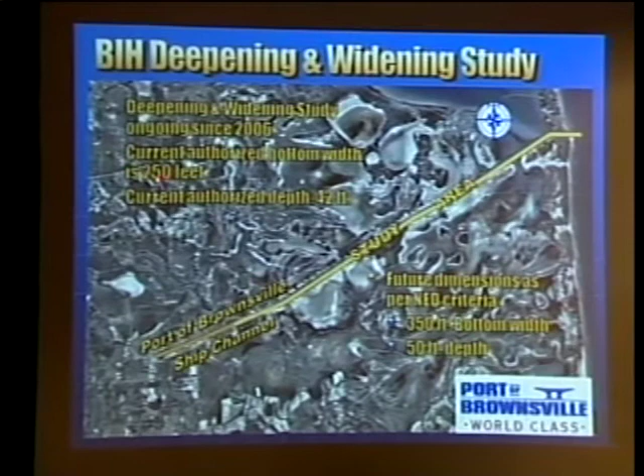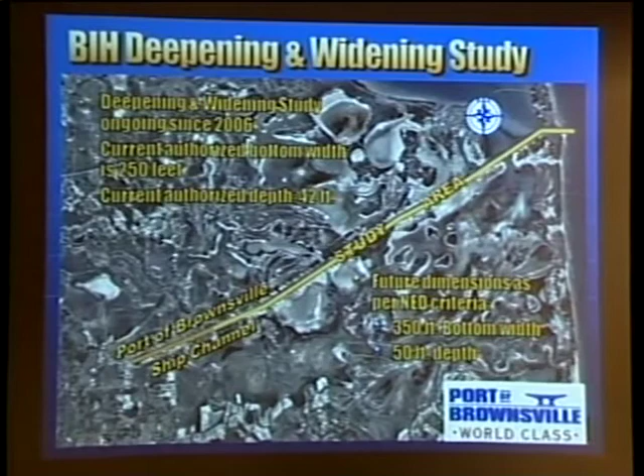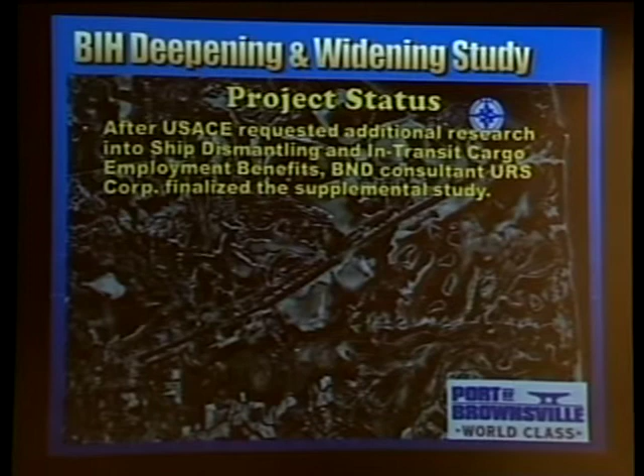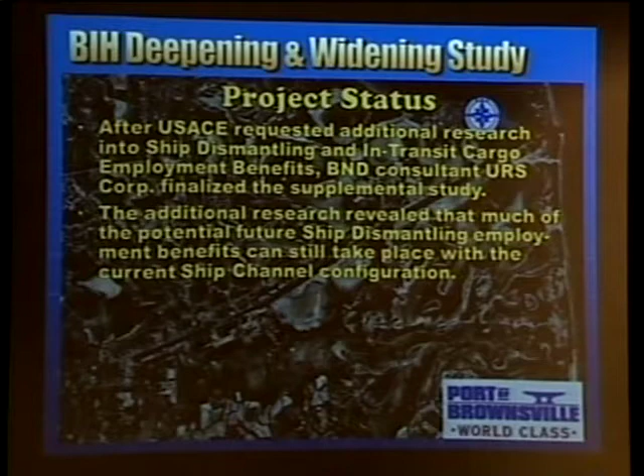The first one, as we've always informed you about, is the BIH widening study. In this project, we've got the overall picture of the channel showing the original bottom width and depth, and the projected bottom width and depth we're working on for the NED criteria, the National Economic Development Criteria. Where we are with this project: the Corps had requested additional research on ship dismantling and in-transit cargo, and BND consultant URS finalized the supplemental study for that. The additional research revealed that a lot of the potential future ship dismantling employment benefits can still take place with the current ship channel configuration, meaning what they had originally estimated as a benefit from deepening and widening basically went away.

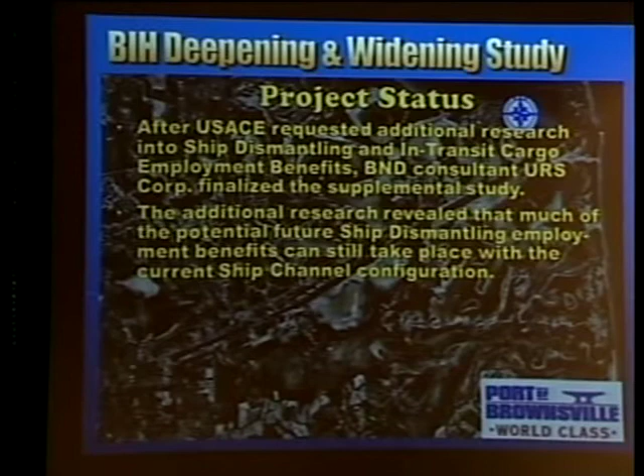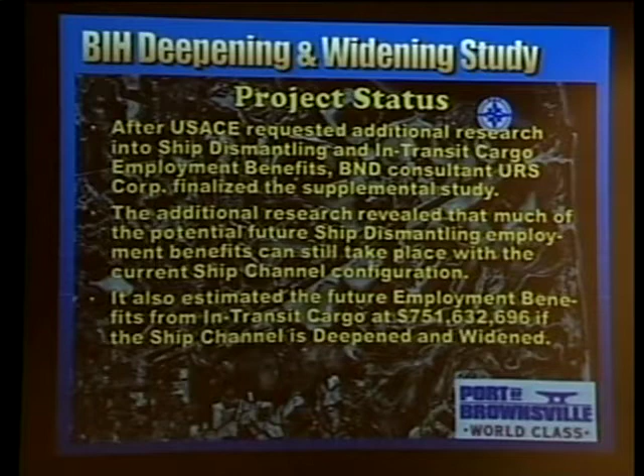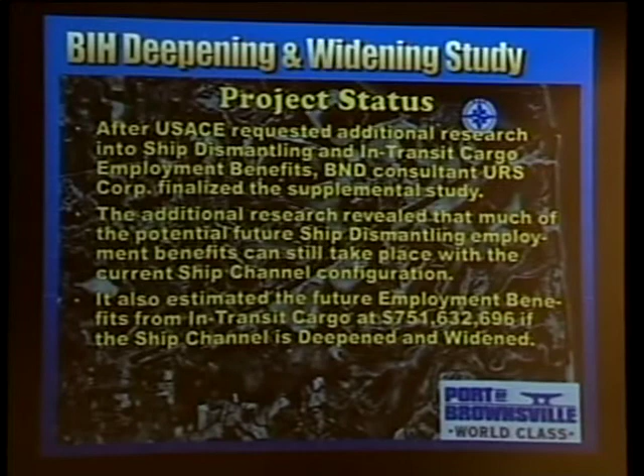There's no benefit by deepening and widening to the ship dismantling operation from employment benefits. However, the supplemental study, when they went into these numbers in more depth, determined there were more significant employment benefits if the channel is deepened and widened for in-transit cargo. The amount they estimated was $751,632,696 if the ship channel is deepened and widened. That's the number they've come up with on the report right now. That report has been submitted to the Corps and to us. The Corps is reviewing it now, and there are some things they're tweaking to finalize it, but they've submitted that final draft, and that's the number they're projecting. That's a very significant number on a 250 or so million dollar project. At 751 million in benefits, that alone gives us a 3-to-1 benefit-cost ratio. So that's very good.

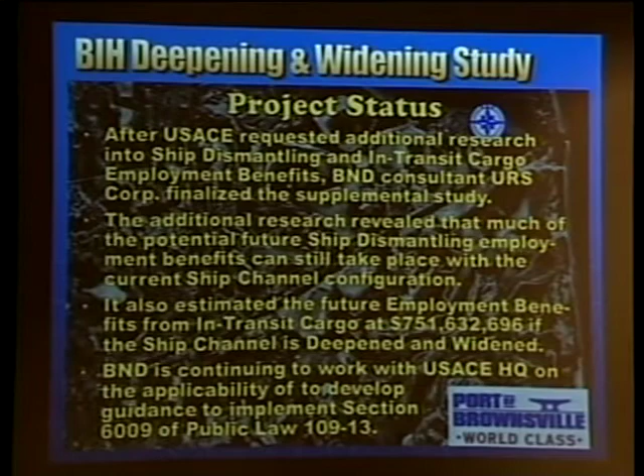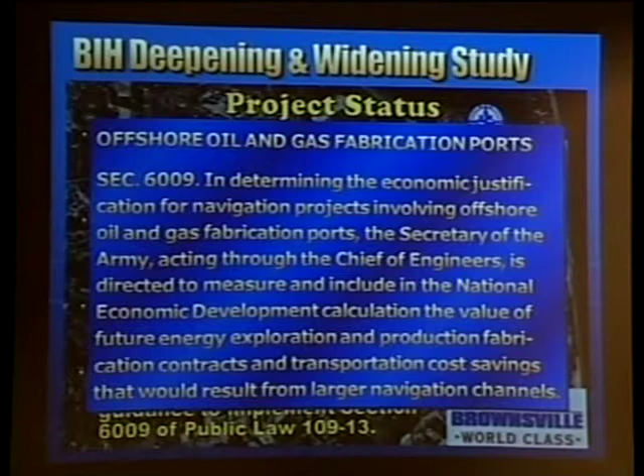We're continuing to work with the Corps and headquarters on the applicability and developing guidance to implement Section 6009 of Public Law 109-13. I don't know how many of you are familiar with that law, but I wanted to show you exactly what it is. It says: in determining the economic justification for navigation projects involving offshore oil and gas fabrication ports, the Secretary of the Army, acting through the Chief of Engineers, is directed to measure and include in the National Economic Development calculation the value of future energy exploration and production fabrication contracts and transportation cost savings that will result from larger navigation channels. This means to us that they're supposed to include it. So that's what we're pressing, and we're continuing to work with them on that.

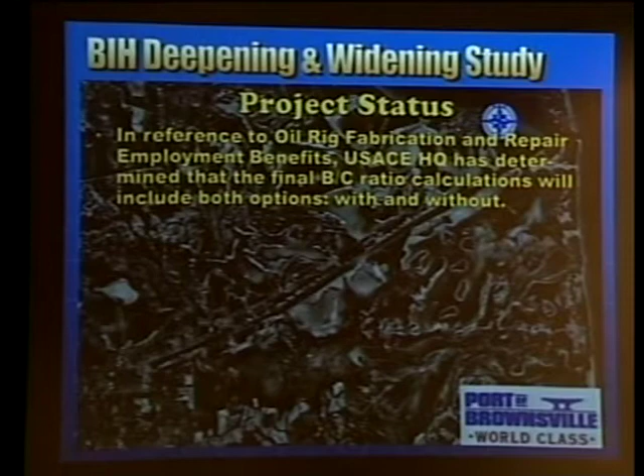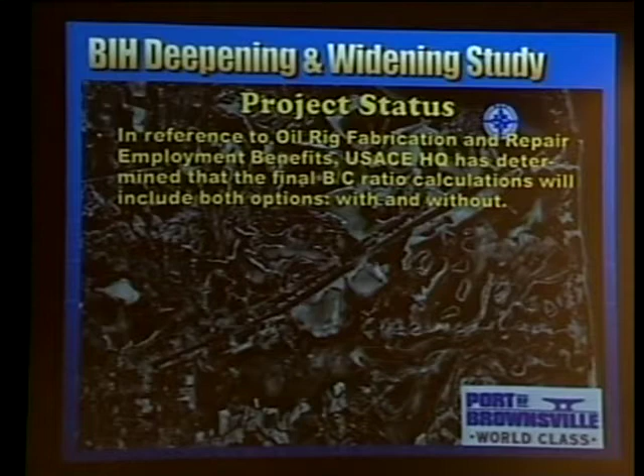In reference to oil rig fabrication and repair, where we are right now with the Corps is that they have decided to do the calculation, see what the benefits will be, and produce a report with and without those benefits included. The benefit-cost ratio calculations will show both options. That's positive on our side because we'll be able to see those numbers. It's not definite yet that they're going to include them, but we are going to see those numbers, so I think that puts us ahead. Also, on the value engineering study, the recommendations, as you recall, were to narrow the channel in one section and make it a little less deep in another.

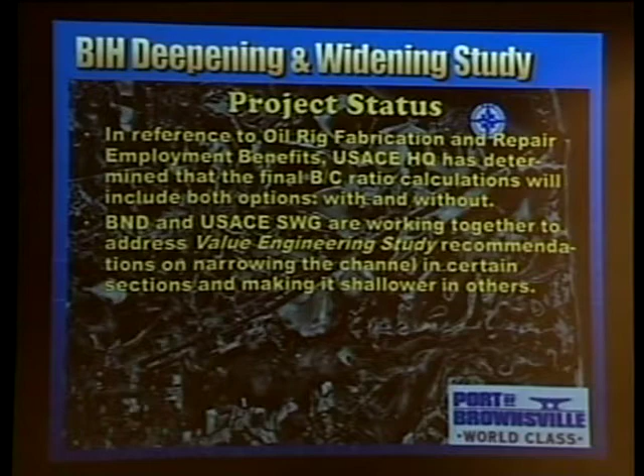After studying it, we believe that shallowing up the turning basin a little bit is not a problem. It's only a $7 million savings. But the narrowing that they want to do, we feel is a problem, and we submitted documentation backing up the fact that we needed to remain at 350. Substantially that came from AmFELS, because it's really the rigs that are going to need the wider 350 width.

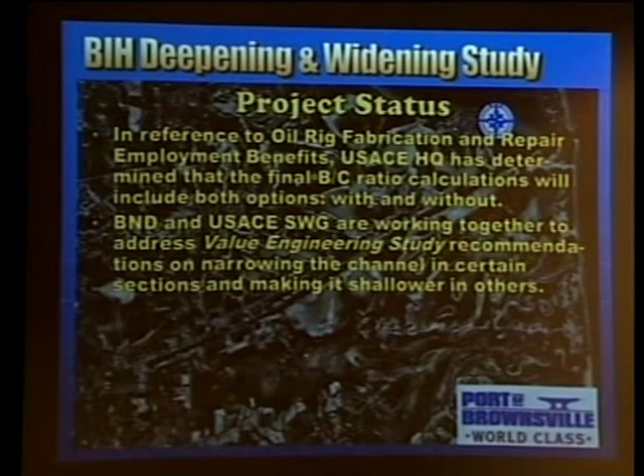Yes, Mr. Chavez, I'd like to, just so the people watching on television and the people from Leadership Brownsville understand what we're saying. When we widen the channel, it doesn't mean the banks are going to change. It's the bottom of the channel, where the depth is, that will widen from 250 feet to 350 feet. Well, that is correct, but there will be some impact, yeah, but not all of it, not throughout the whole channel. I'm just trying to get them a clear picture of what it is we're trying to do.

And what you're talking about here is that we're trying to get the Corps to look at it two ways: that in the national interest, we have both the job benefit as well as a commerce benefit to the trade of the United States.

But local jobs will be provided, and that's exactly the $750 million worth of jobs over that period. So that's just in transit. You haven't coupled in the numbers for the fabrication, the rig fabrication. And then the other numbers are just the regular commerce that would accrue from the widening and deepening, which is the additional tonnage that we would experience.

Well, I know when we went to 42 feet, it opened up a whole new world for us, and at 50 feet and wider it will open up more.

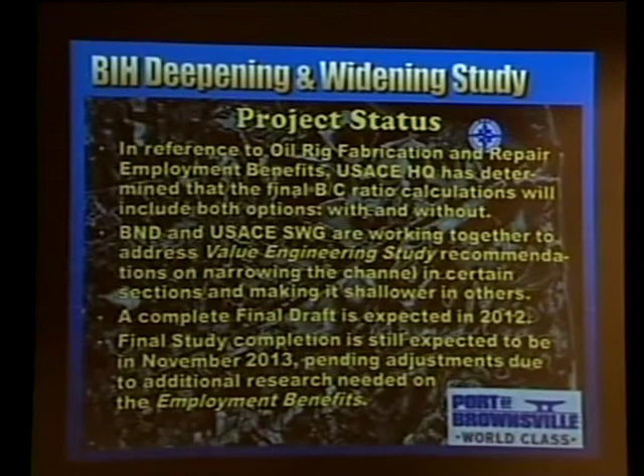Thank you, that's a very good point. And like I said, the complete final draft is expected in 2012, and the final study completion is still expected to be towards the end of 2013. It's of course pending adjustments on finalizing this issue of the employment benefits.

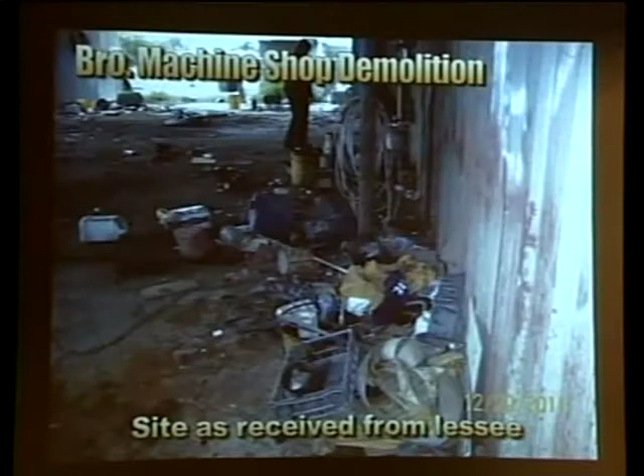Now I'm going to show you some projects that are being done internally by the Corps. Some of them are minor, some are a little more significant. This one here is the Brownsville Machine Shop demolition. This is a building—Mr. Garza is here if there's any questions—this is a building that was in very, very severe disrepair.

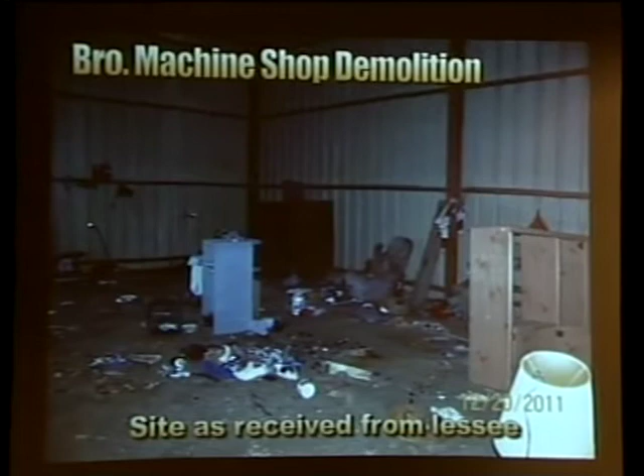This is the site as it was received, and these are some pictures of that area the way that it was. This is a lot of the debris that was at the site, right over here behind Milo Road.

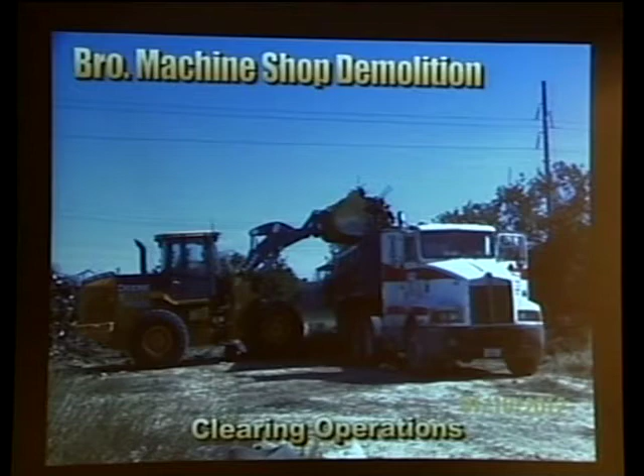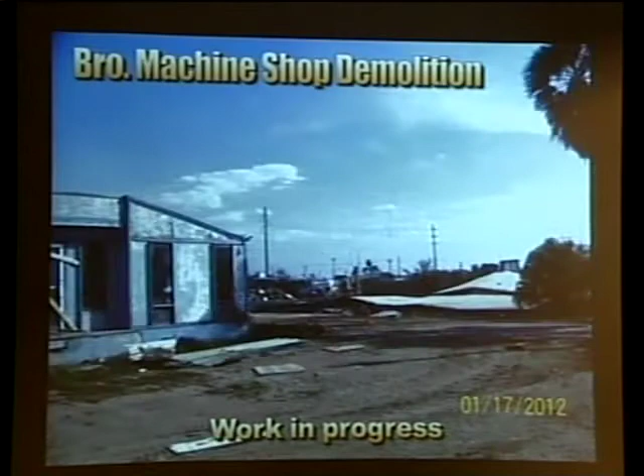And here's when we start the clearing operations with port equipment, trying to get everything out of the way. This is debris from demolition of the building. Again, debris from demolition, a work in progress, and basically most of it is cleared already. The only thing remaining at this point is that building, and the reason it hasn't been demolished is because there's some, what we consider, personal effects, Mr.

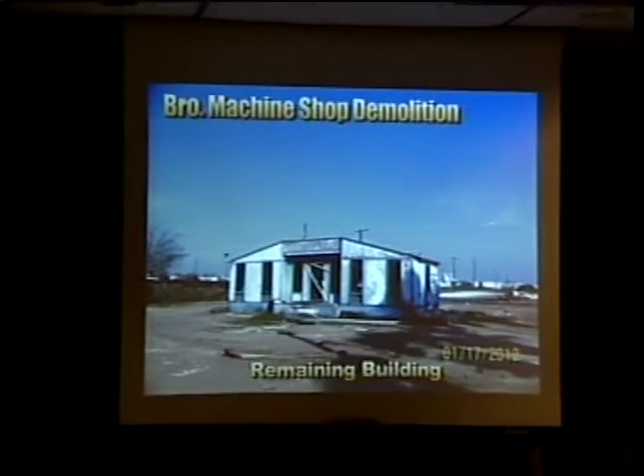Or maybe things of sentimental value that are in there, some pictures, family photographs and things. Mr. Garza can address that in more detail. Basically, when we went in there to look at what was inside before we demolished it, we found some pictures that belonged to the tenant that was there. So we decided to notify the tenant to give him an opportunity to come and pick them up. Unfortunately, he hasn't done that. So what we're going to do is box them up, and they're not that many, take them to the shop and store them there. Maybe one of these days he'll want to pick them up, but we don't want to destroy them. And that's why this one's still standing.

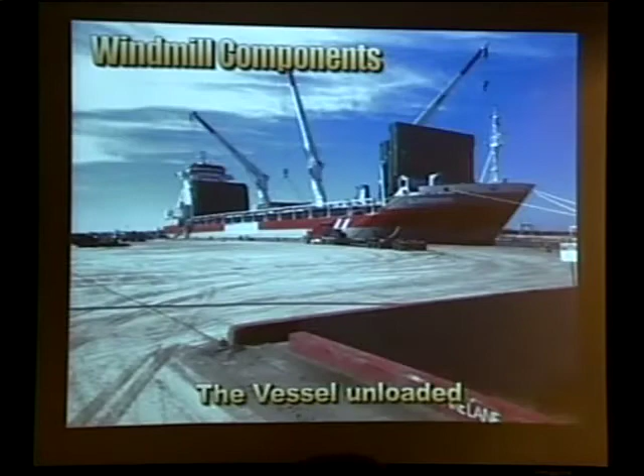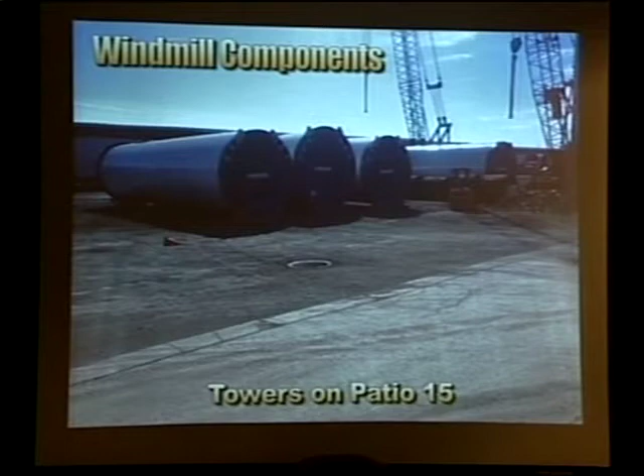Another project, again in-house, is the one that we talked about earlier. This is the Windmill Components. This is the vessel that came in, the Wagenborg, and this is towers being unloaded. The vessel is already unloaded here, and we've got the towers on the patio. These are the segments. There are three types of segments, the three components that make up the tower, and they're all spread out throughout the area of patio 15, as Mike informed the customers earlier. So these are just shots of that.

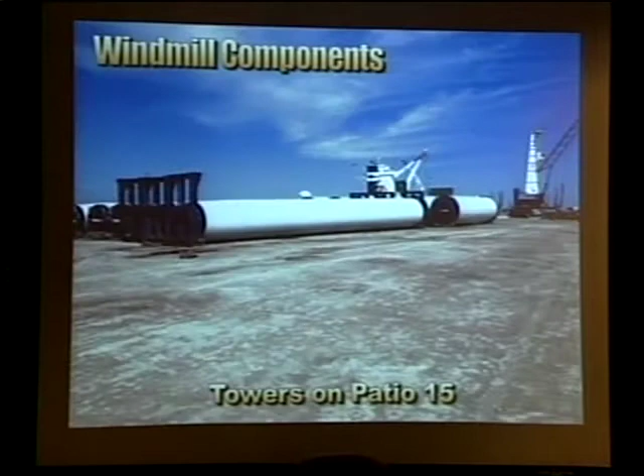Here's a video of one of those towers being brought out. It's a massive component, so it has to be brought out very, very slowly. Looks like a rocket ship, basically. This was one of the long sections, about 100 feet long, Michael. It obviously has to come out very carefully. There are some other videos we didn't add that show how they came in and backed it up into the places where they were going to go. So this is just showing how it came out, how the turn came out and everything.

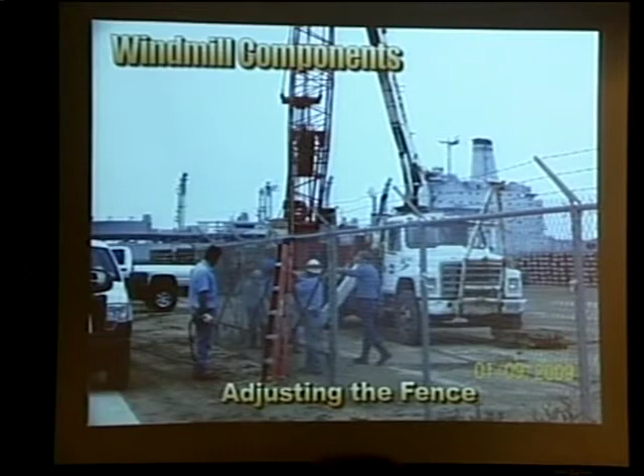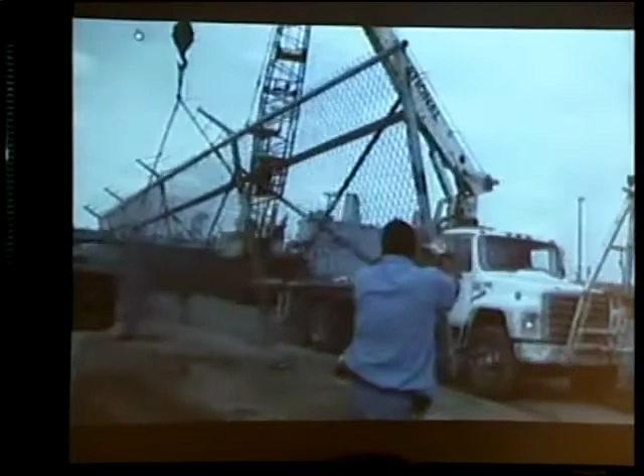So that's about it right there. One of the things our maintenance department also did is create a manner in which to remove the fence and reinstall it in the short term. Here's a shot of them adjusting the fence and cutting some of the chain links to remove only the portion that needed to be removed, and then have it replaced. Here's a video showing a little bit of what they were doing, bringing it up and down with the winch. Again, this was done by our own in-house crew. This section of the fence was removed, and after the movement took place, the fence was replaced again. This one just shows our people working.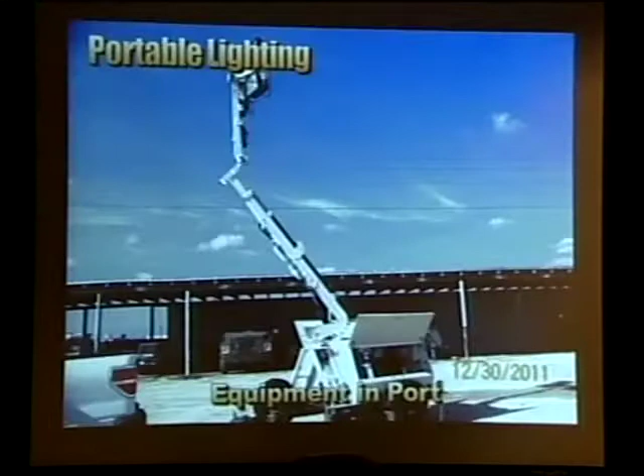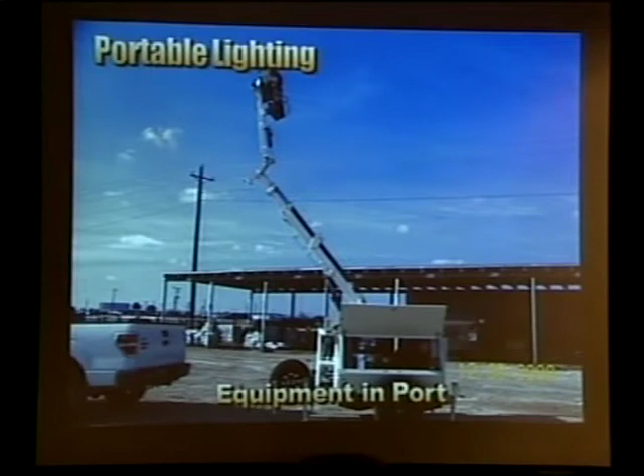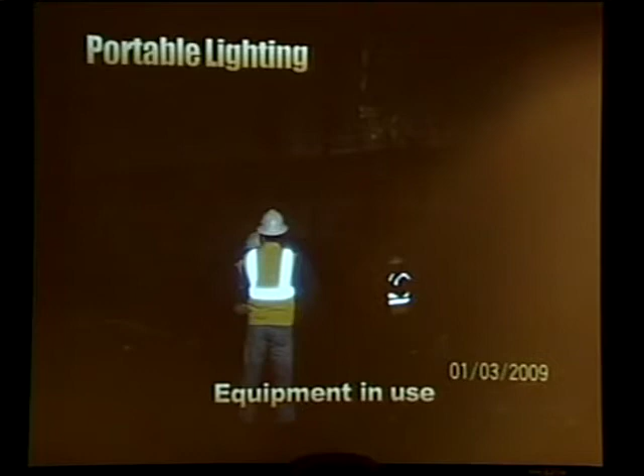Another project we're looking at is the acquisition we made of portable lighting. These are the lights that were acquired recently. Four of these units were delivered to the port, and they were actually used pretty soon after, because on one of our docks where we were working on the electrical systems, one of the stevedores needed some lighting during the night, so they were basically used. These are the units over there, and here's another one, just helping the stevedores do the work they were doing. No, sir, we were just kind of lucky that we got them when we did, because a couple of days after we needed to deploy them to dock 11, and the stevedore was very happy that we could provide the lighting. So they worked well there.

Great job. Who said wow? We need to remodel what's in the building.

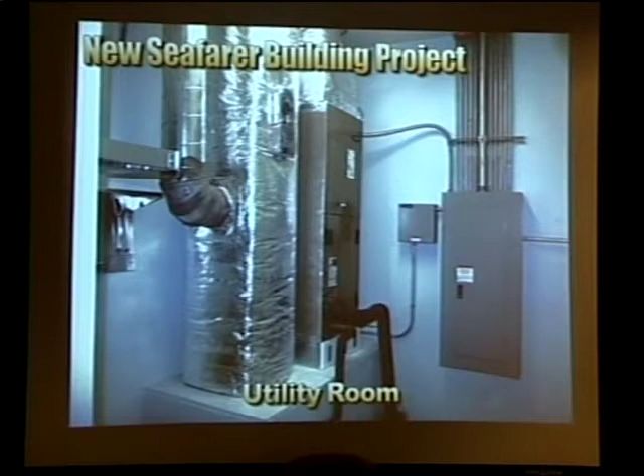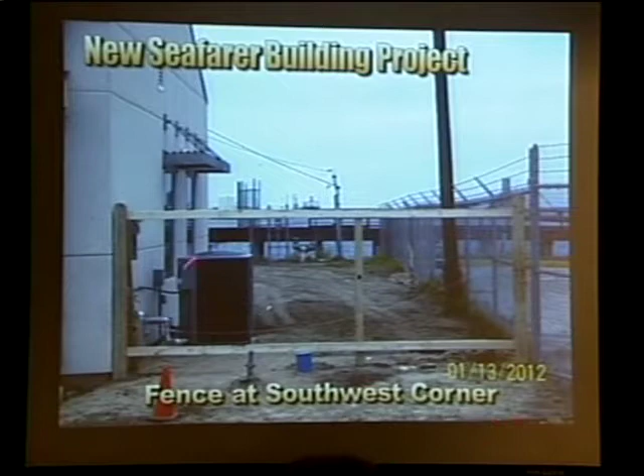We're going to extend that fence from the other side. This is a completed fence, again work that was done by our own maintenance department.

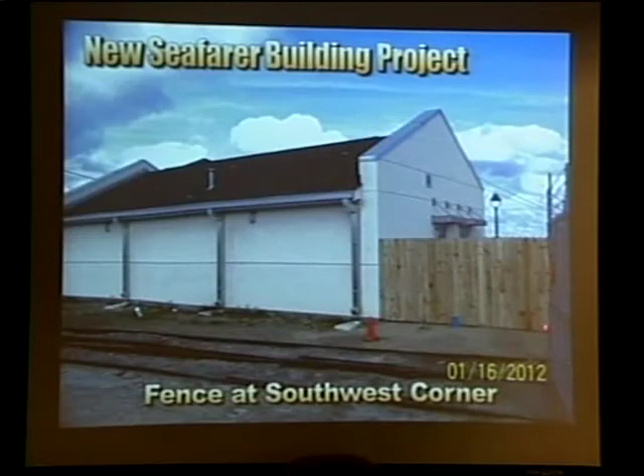This is the fence along the back wall. The fence is going to continue there on the other side, and this is basically the end of that back wall - it's going to continue along here.

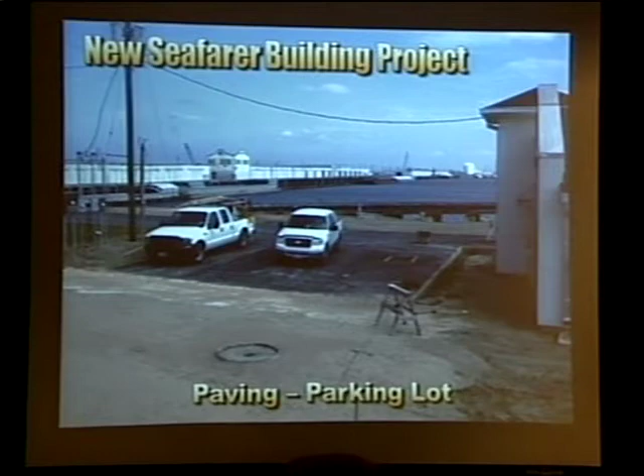Here you see a bit of the work on the concrete pavers that will go in this area for the sidewalk leading into the Seamen's Center. This is the parking area, already hot mixed and everything. This is the access to the Seamen's Center, Harbor Master Road coming in.

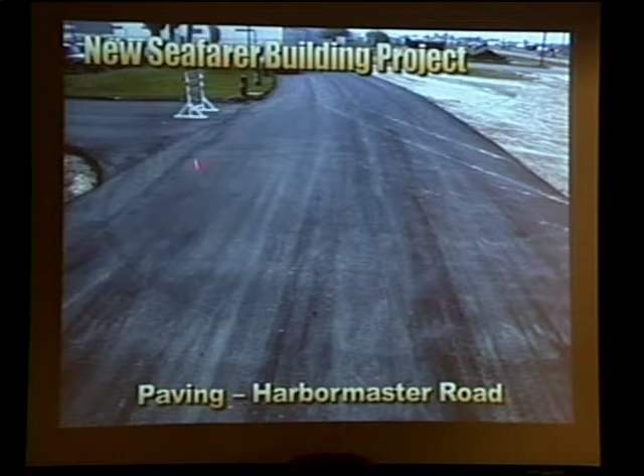This is the entrance to Dock 4 coming back, and at the end over there is Windhouse Road. This is Harborside Road, which goes into the Seamen's Center, right there. And this is, of course, the Harbor Master's office.

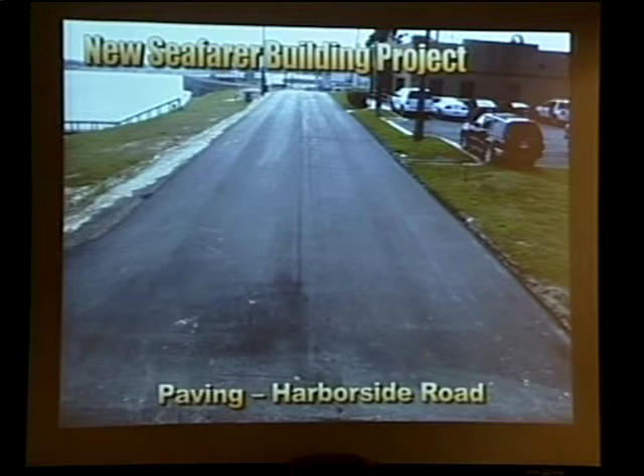So now we have proper paving access to the Seamen's Center. That's it for that. Another project is, of course, the Dock 11 Road Transformer Pad.

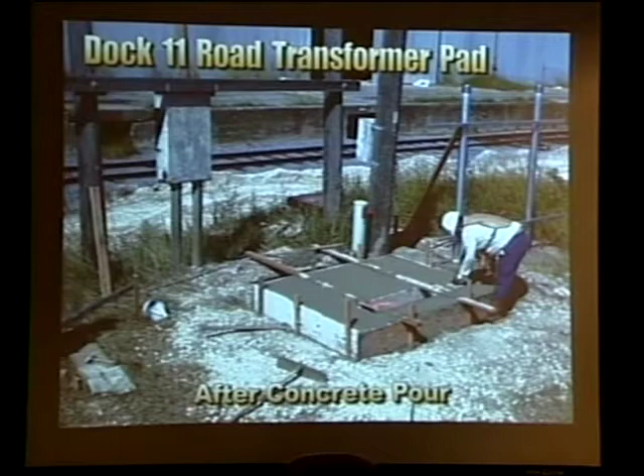This is something we actually had on the books since Siemens came in. This is a picture I had shown you before, left here so you'd remember what the concrete pour was back then. But this is the finished product - the concrete slab with PUV having installed the transformer.

This is the H-frame with stainless steel Unistruts, the meter can, and the cutoff box. This is a close-up of the transformer, the cutoff box and the meter can. And this is another shot from the opposite side showing the box, the cutoff switch, and the meter in place - a shot of the meter.

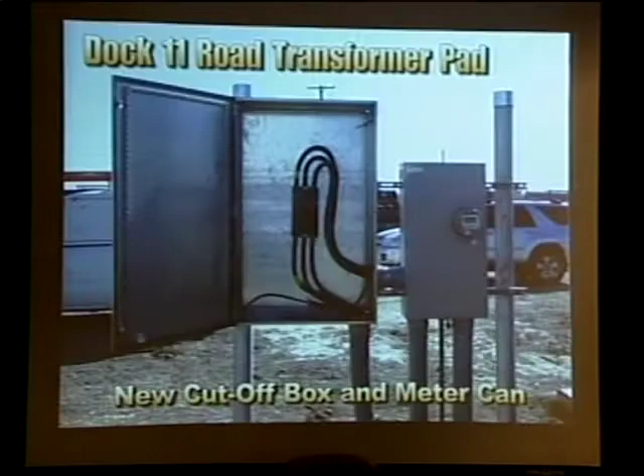So everything is now functioning. Are those poles going to be taken down behind? Yes, the wood poles, the wooden H-frame and everything, that's going out. The overhead wires that came into there, PUV is removing them also - I believe they've already removed them. No, I don't think they have yet, so those are still there but they need to be removed because obviously we're doing this underground. So that's for this project.

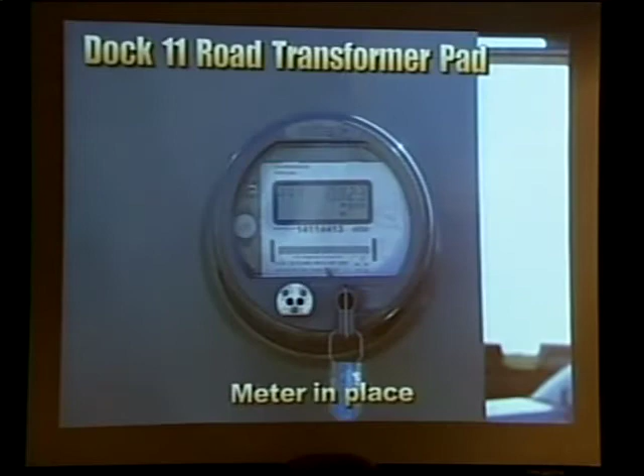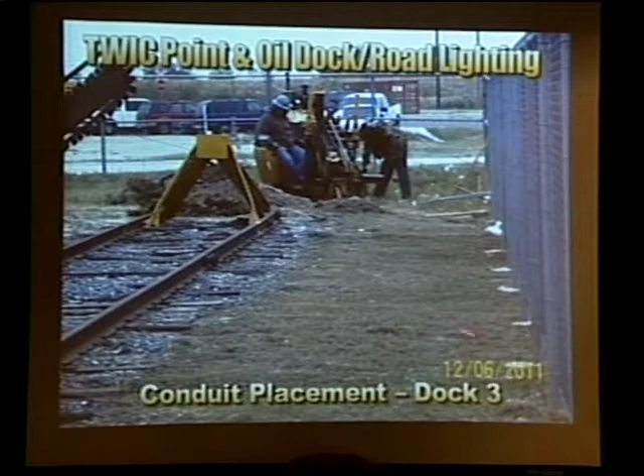Another project we're working on is the TWIC Point and road lighting project, which is placement of conduit on dock number 3. One thing this contractor is doing that we're very happy about is instead of open trenching the whole set of conduits, they have a machine that installs by underground boring.

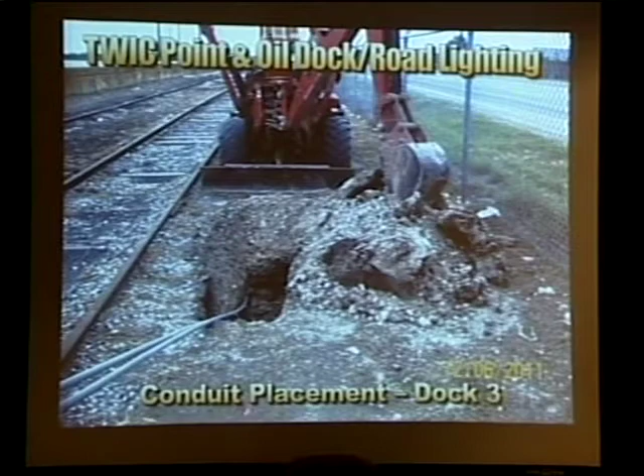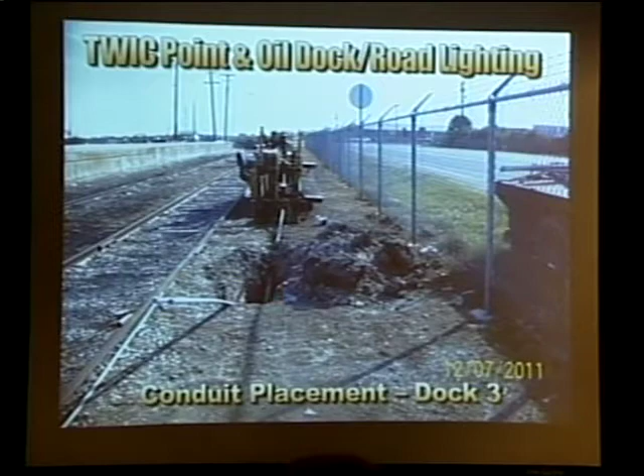So instead of open trenching this whole area behind dock 3, they put everything underground with the conduits. They have to have little areas where they pull up the conduit - this is where it's coming up. Again, this is the conduit placement in dock number 3, you can see that there. This is the dock part, and this is Windhouse Road here, and this is our fence. They only have localized open trenching because most of it is being done by boring, so that's a plus.

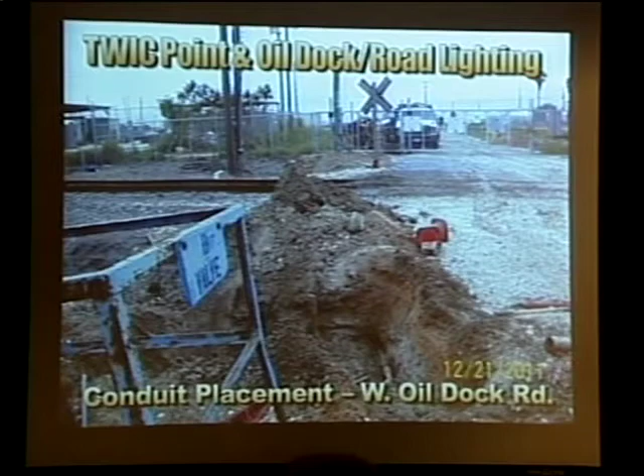See, this is on the entrance to Oil Dock Road 1. Basically, this is Oil Dock 1 on West Oil Dock Road coming in. This is, again, the conduit placement in this area. You see the boring machine there.

That's a lot better. Now, this is an area where there was a lot of old pipes. Most of these actually were not in use, but when they were trying to bore through, they hit them, so they had to open trench to make sure that those were not something they were going to hurt. So they took extreme care going through here.

And the reason I'm telling you this is because we've got an item down the line where this is going to be important. Remember this. So this is one of the things they had to be very careful with because they didn't want to create a situation with any of the existing pipes. Fortunately, after we found these, we found that most of these were not in operation, like I said.

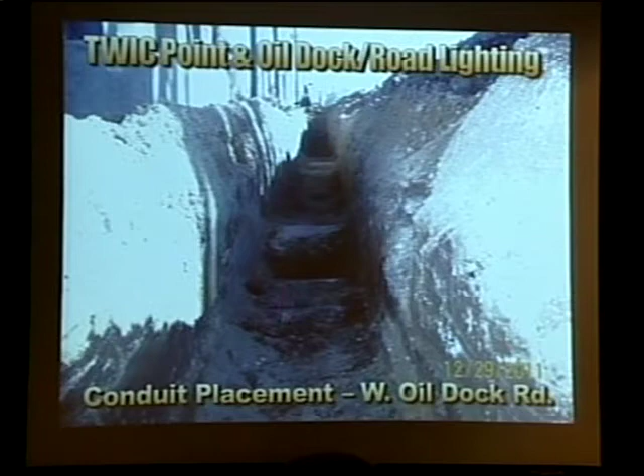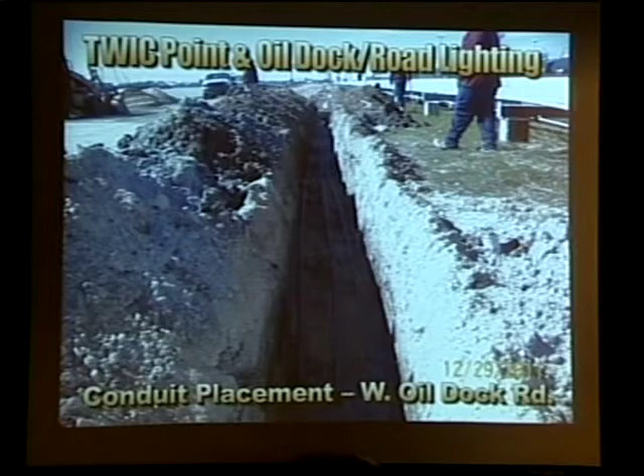So here again is the conduits. Two of these are the conduits that lead to the poles. One of them is a spare, one of them is the feeder, and the other one is a conduit for remote control for the future. And again, these are just shots of West Oil Dock Road.

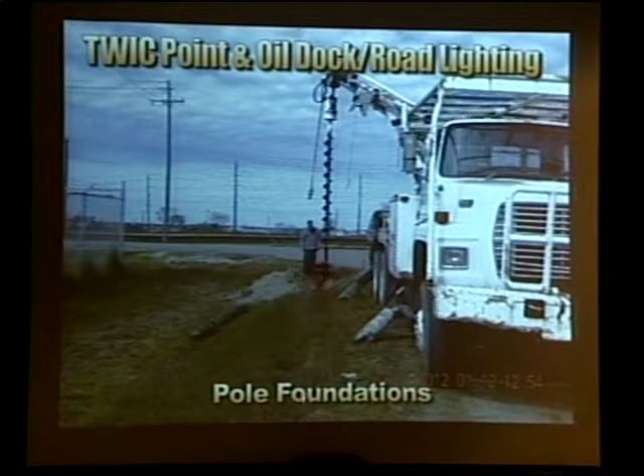Conduit placement, these are now shots of the pole foundations. That's the auger that created the hole that goes down where the concrete is going to be poured. Here, that's what they're doing with their auger. This is the foundation, basically the hole going in, that's going to be filled with concrete. That's actually the ruler used by our inspector to make sure it has the proper dimension.

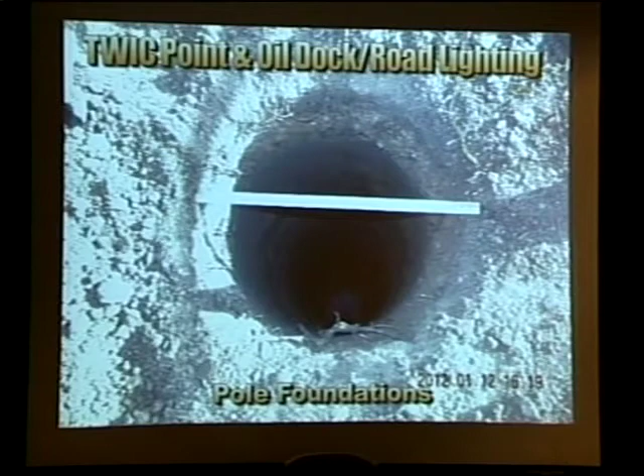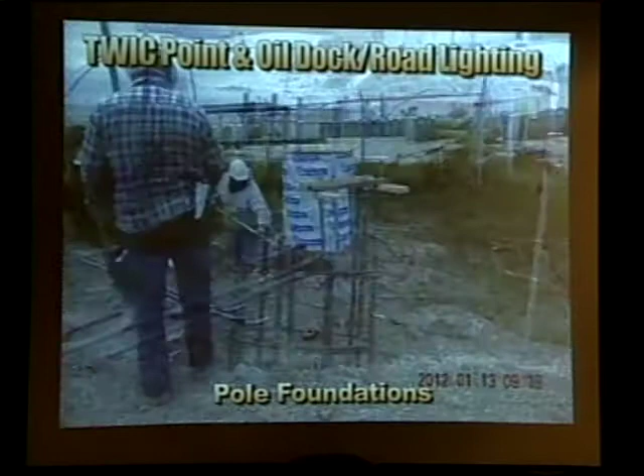This is the reinforcing steel cage that is going in there. This is the cage in place. And this is the form for the concrete, a cardboard cylinder that goes up from the ground, and then this is already poured. You can barely see it there, but the concrete is already in place. Of course, you see the whole thing there with the concrete.

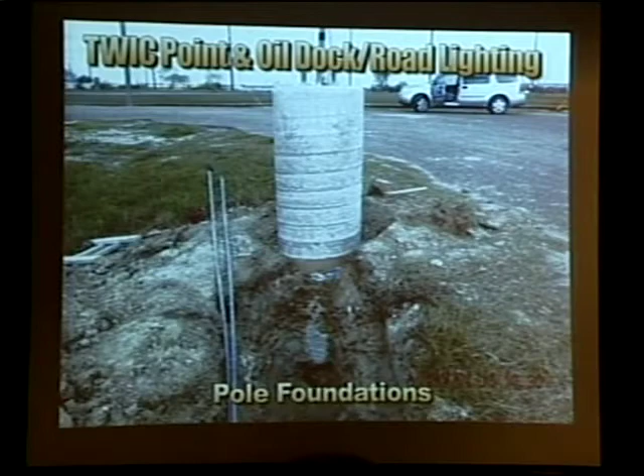So that's basically the pole foundations they've started. They're already working. Today they were working on Anchor Road. They ran into an underground pipe that nobody claims, so we think it's a dead pipe. We checked with everybody, and it wasn't spotted by anyone, so no one seems to claim use of it. We're anticipating there's not going to be a problem.

We also consulted with a contractor to see if we could contract some of this out within the limitations that our purchasing procedures have, so that we can do this at a fast pace. After my meeting with the contractor today, we believe we found a way to get the contractor involved to a certain extent and help us speed this up, and then have our own crews complete the work on the surface. So I'm going to send out an invitation, a request for quotes on this tomorrow, hoping to open bids maybe on Monday, with sealed quotes. Then if they all come in within the parameters, we'll be able to engage those contractors right away. If they don't, we would have to reject all the bids, but we're anticipating we'll be fine within the parameters we're supposed to have.

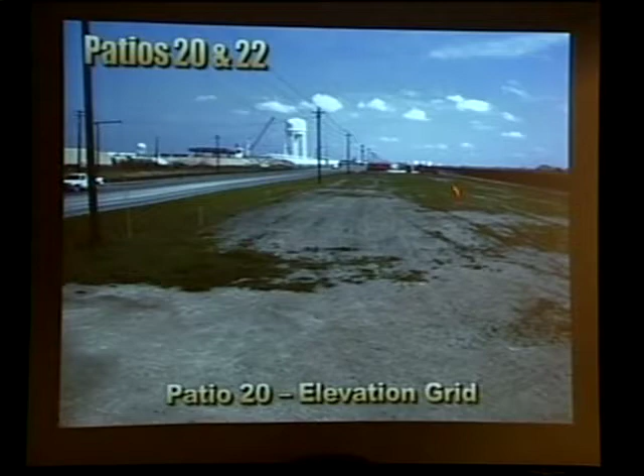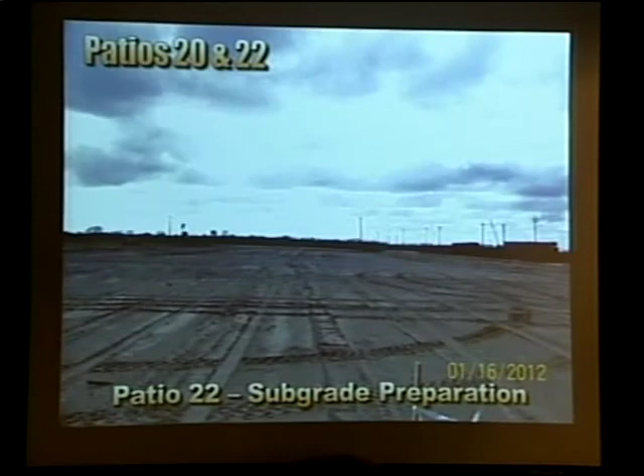So this one's going to be worked on at the same time as Mr. Garza's working on the other one, which is this one here on patio 22. That's our equipment and our personnel. So this is basically on patio 22.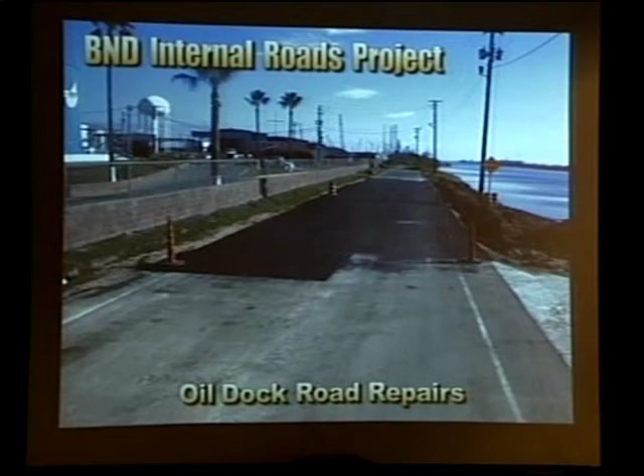Another project is the internal roads project. On this one, we basically just had some repairs. This is the Oil Dock Road repairs completed. As you can see in this area, that's where we beefed it up so we wouldn't have any weaknesses or additional failures. This is a perspective from the east looking west.

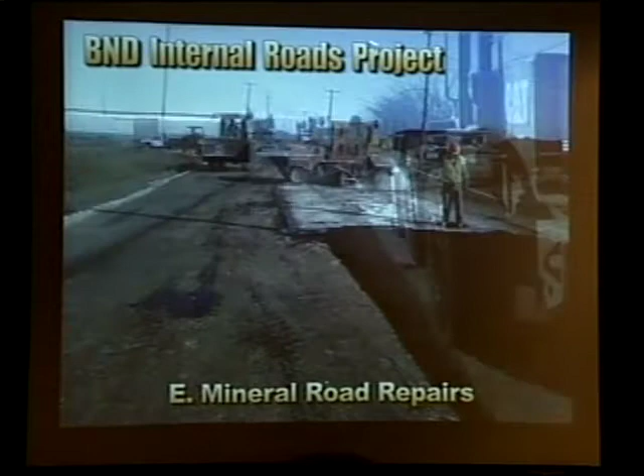This is East Mineral Road repairs. On this one, we had a lot of issues because a lot of trucks moved here, and I believe this is substantially more truck traffic than what was counted when these roads were designed. So instead of leaving the 6 inches of limestone that was designed, we went back and beefed it up with 12 inches of limestone and put geogrid underneath. We believe that's going to hold up really well. This is on East Mineral Road again. This is on West Mineral Road.

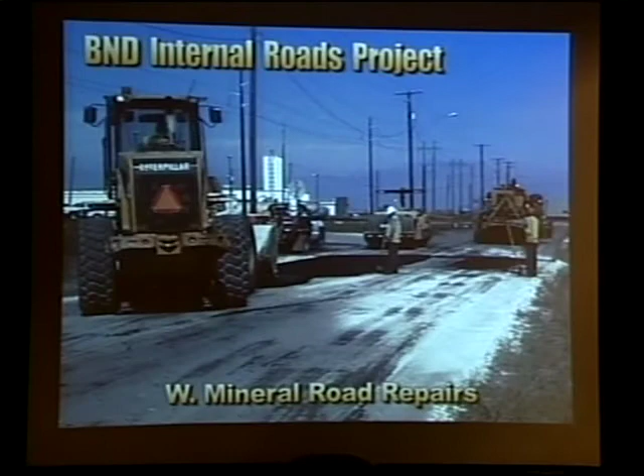On this one, we only had a couple of pockets that we had problems with. So these are just some of the patches that we're getting there. And that's basically it for the internal roads project.

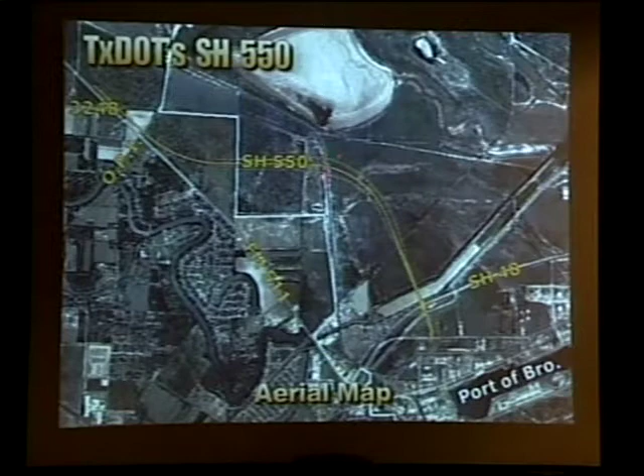The last project I always show you is the 550. This is the aerial map that shows the area. I'm going to show you an area here on OPI, 3248, this intersection with the rail, and what's going on right here at the floodway.

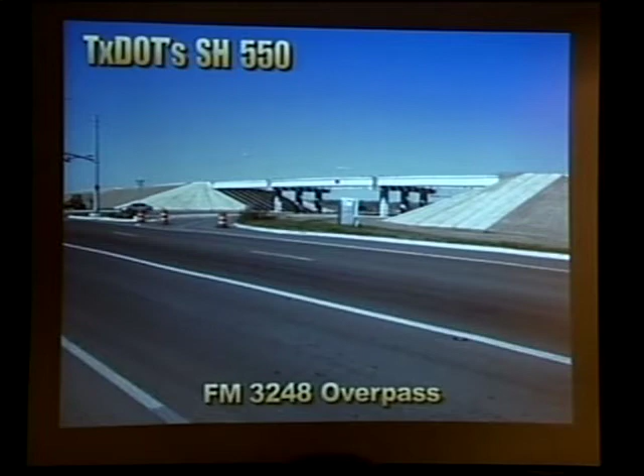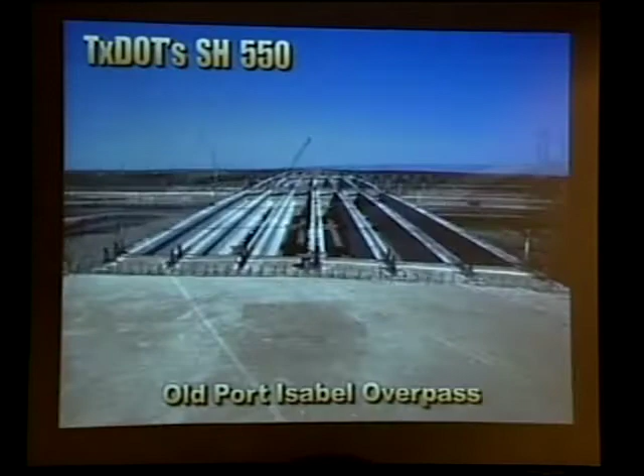The first one is the 3248 overpass. All the beams are in place and they're starting to place the panels on top, so that work is progressing. This is the old Port Isabel overpass, which looks really awesome. From the top you can see the beams, and they're also starting to place panels on this one. Here you see the main lanes looking towards 3248 from the overpass on the one that loops back in.

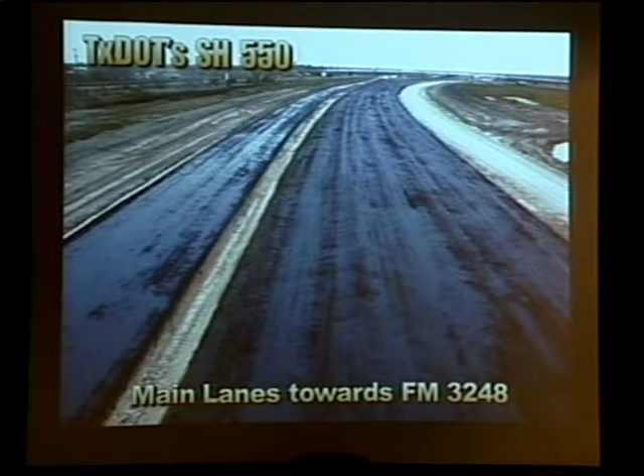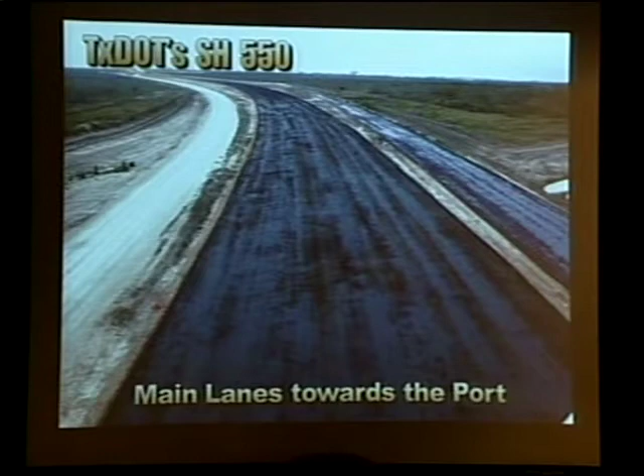Of course we had all our lights and everything, so there was no risk for any problems. As you can see, they've already primed, so they're getting ready to start hot mixing in this area. Usually when you prime, you leave it 48 hours or a little more, and then you can come in and start the hot mixing. Here you can see the same thing looking back towards the port.

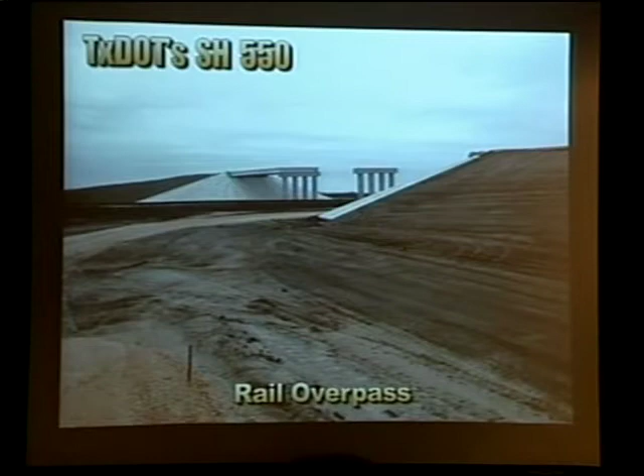And then this is the rail overpass. As I told you, they've only placed the beams on the west part. This picture is actually from today, and they're still working — they didn't have anybody there to do the rest of the beams today, I don't know if it was weather or what. Where they were working was here on the Rancho Viejo floodway. This is the crossing of the floodway looking into the port. That's the port connector road over there, and this is the one that's going to connect to it. That's basically it for the construction report.